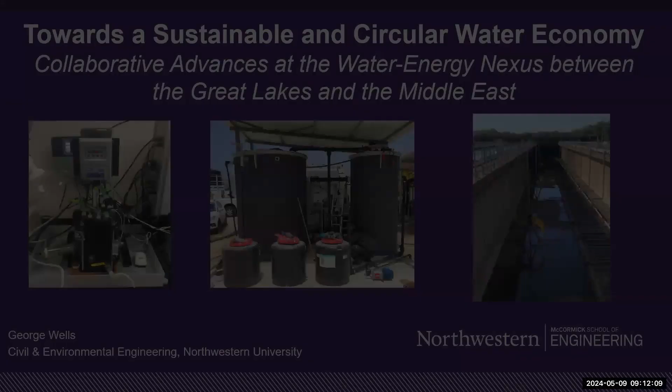Very good. Thank you, Aaron. Really a pleasure to be here, to be part of this important conversation. Really looking forward to the day.

What I want to talk to you about a little bit to sort of kick off the symposium this morning is a broad overview of some of the work we're doing at Northwestern with our collaborators, with partners, towards a sustainable and circular water economy, really trying to delve into this area of inquiry, targeting collaborative advances at the water-energy nexus for the Great Lakes and for the Middle East, Israel and the Middle East.

This is not going to be an overly technical talk. We'll delve into technical details in subsequent talks for technologies being developed through CoWERC and through Great Lakes Renew. This is going to be a bigger picture talk. I'm going to try to talk a little bit about motivations for water innovation and some of the larger scale efforts that we have at Northwestern and in the region as well.

So roadmap for today: I want to talk just a little bit about water circularity and the water-energy nexus. Then I want to talk at a high level about the role of technological solutions, in particular some of the work going on in CoWERC and in Great Lakes Renew that we're just getting off the ground — we'll hear a lot more about that throughout the day. And then I want to wrap up with a couple of minutes to make a pitch for the role of water technology collaboration in driving geopolitical cooperation. I think there's a really key role here, and I think that's one of the drivers for many of us in this area.

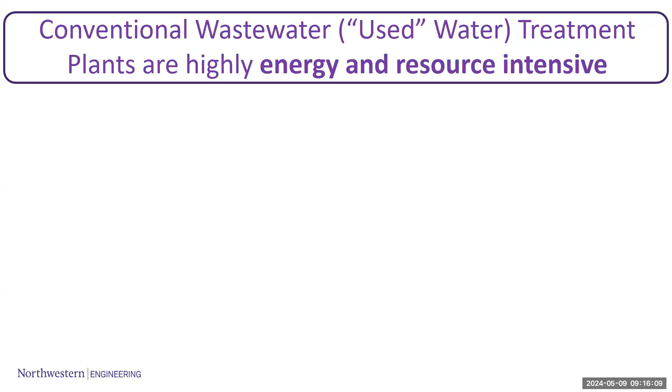Where is that energy used? Wastewater treatment in the US alone accounts for about 3% of nationwide electricity use. Most of that energy, there's actually quite a number of different sinks for energy, but a very good proportion, by far the majority, or the largest share of that energy use is used for oxygen supply to drive microbial metabolism, aerobic chemoorganoheterotrophic microbial metabolism, basically bubbling air into water. That's where the energy goes to, which is a little bit interesting.

What's paradoxical here is that when we look at the energy potential, just the chemical energy potential in wastewater, what we find is that there's a lot of potential energy there. We're expending lots of energy to remove actually energy-rich compounds from wastewater. If we widen our umbrella for what we think of as wastewater, and we include organic-rich municipal, industrial, and agricultural wastewater, the estimate in the US is that the chemical energy potential, not including thermal energy, just chemical energy potential, is about 17 gigawatts of power.

So a bit of a paradox here. We have an opportunity, I think, to flip this industry on its head, to move from an energy-intensive industry to potentially an energy-neutral or even an energy-positive, energy-producing water sector. And this really underlies what I see as a paradigm shift that is ongoing in the water sector towards resource recovery, moving from this linear processing of water.

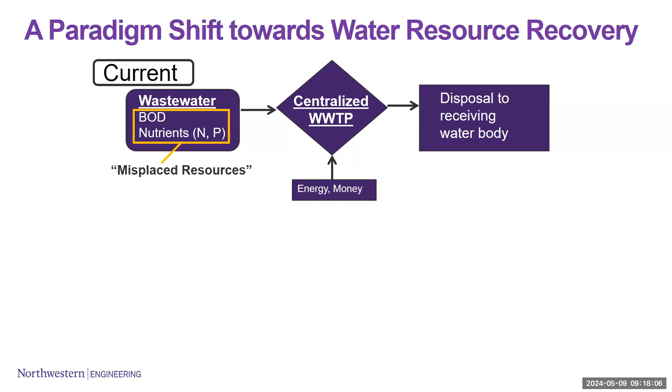The organic matter, the nutrients, the water in wastewater, these all have potential value, and it behooves us, as a community, to move towards energy-positive water resource recovery by rerouting these misplaced resources and closing the engineered water cycle, really moving towards water circularity.

So just a very high-level schematic of this vision that drives much of what we do in my group. We have used water. Again, this semantic reframing is very important in my view. It's not wastewater, it's just lightly used water with organic matter and nutrients. We send this to, I'm an environmental biotechnologist, so I like to think about biorefineries, but we can also use physical chemical processes to extract energy, nutrients, materials, platform chemicals, maybe metals and minerals as well, and of course, clean water. And where it makes sense, we reroute that clean water for reuse. This vision of water circularity and resource circularity really drives a lot of what we do in my group.

It also drives, I would say, much of the innovation, collaboration, and technology sharing that we're seeing in the water sector at this point. I'm going to mention two other drivers that I think, in my view, underline or drive a lot of this innovation at present. The second driver is a move towards decarbonized water systems, addressing the greenhouse gas footprint of our water sector.

And climate-independent water sources - this is an example of climate change mitigation and adaptation. What do I mean by climate-independent water sources? I mean moving away from a focus just on our traditional, very high-quality water sources to alternative water sources, things like seawater, wastewater, saline groundwater, and the like.

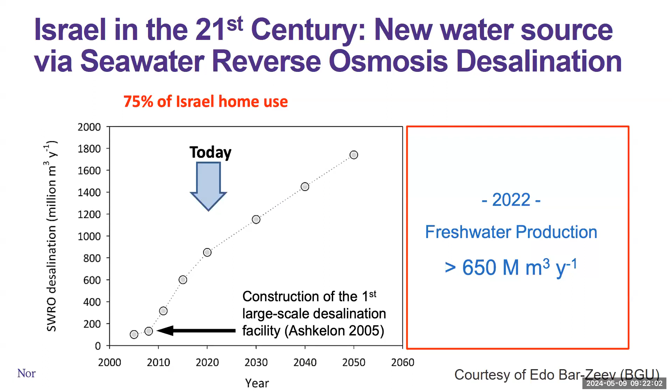In Israel, over 85%, I think it's close to 90% now of wastewater is reused, which is astonishingly high. That's the highest by far of any country in the world. I think number 2 is Spain, if I'm not mistaken, which is around 20% or so - Spain or Singapore, yep, exactly, but much, much lower percentage. So this is really quite astonishing, and again, in quite a short amount of time for the water sector.

So I want to highlight big picture collaborations now that I think are helping to drive technology advancement, technology sharing, and collaboration, transboundary collaboration.

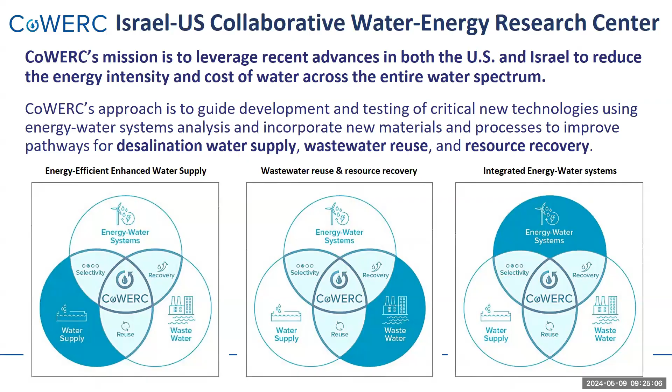We have a focus on integrated energy water systems, using systems analysis to understand environmental and techno-economic impacts of technologies. This center has been in operation for 4 years now, and has achieved some really amazing goals over that time period. I'll highlight a couple of the technologies in a minute, but I want to draw a connection here.

To the new center that Eric and Aaron mentioned, Great Lakes Renew, which is also to some extent a transboundary water innovation center. It's trans-states, but I think we're trying to develop technologies that address problems that are certainly regionally relevant, but also globally relevant.

The NSF Great Lakes Water Innovation Engine was just funded. It's led by Current, a water innovation hub here in Chicago. The mission of Current is to discover, develop, and deploy innovative technologies to decarbonize water and wastewater systems and recover valuable nutrients, critical minerals, energy, and water from wastewater—water resource recovery, moving towards this goal of water circularity.

There are very strong synergies between these two systems. The tagline, which I really like, is 'from waste to wealth and health, built in the Great Lakes, made for the world.' So we're addressing regional issues, but trying to do so in a way that contributes to solutions of water issues globally.

I'm just going to highlight a couple of technologies at a high level. I won't go into detail for the sake of time—we'll get more technical details later—but a couple of these solutions we're pursuing in CoWERC and Great Lakes Renew. The first thing we're trying to solve is the massive energy use in traditional wastewater treatment that derives from oxygen supply, about 50% of energy use comes from just supplying oxygen to microbial bioprocesses.

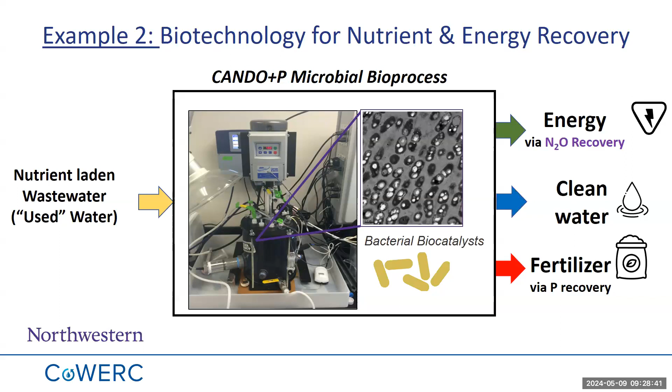The third example I'll give, just touching on a little palette of technology options—happy to answer questions and go into detail later—is a much newer project, aligned with the Great Lakes Renew efforts, where we're seeking to develop completely new ways to recover dilute nitrogen from wastewater as value-added products. We're particularly interested in an underexplored bacterial biopolymer called cyanophycin, a nitrogen-rich biopolymer that we think may have promise as a platform for nitrogen bioconcentration, partitioning, and recovery.

What have we done so far? I'm going to show you just a little bit of data here because I'm really excited about this project.

What we've recognized so far is that the metabolic pathway for cyanophycin production has been documented in a handful of model pure culture bacterial taxa studied on their own in the lab. What we don't know is its relevance in mixed culture systems and its potential as a platform for resource recovery. The first question we wanted to ask is whether microbiomes in existing biological nutrient removal systems at wastewater treatment plants already have the capacity to accumulate cyanophycin. We turned to a DNA and RNA sequencing approach to look at this.

We retrieved quite a number of what are called metagenome assembled genomes — genomes of bacterial taxa present in existing wastewater treatment plants. We asked whether we could document the presence of metabolic potential for cyanophycin in these genomes. We found that about 25% of the metagenome assembled genomes we recovered had an annotation for cyanophycin production, which is quite surprising — that's quite high. Even more surprising was documenting this metabolic potential in a couple of the functional groups very important to driving overall performance in enhanced biological phosphorus removal and biological nitrogen removal systems, for example so-called polyphosphate accumulating organisms.

We also looked at some gene expression data, metatranscriptomic data from a lab-scale enrichment reactor in our lab, for this key functional group, polyphosphate accumulating organisms. We showed that these cyanophycin pathway genes are not only present but expressed at a very high level. To me, this is quite promising. I want to emphasize this is very low on the technology readiness level scale — early stage research — but we think it's promising because it shows that metabolic capacity for cyanophycin accumulation may be surprisingly widespread, even in existing biological nutrient removal processes. Because of that, we may be able to use existing infrastructure as a platform for nitrogen bioconcentration, partitioning, and recovery. Hopefully more to come on this line of research in the years ahead.

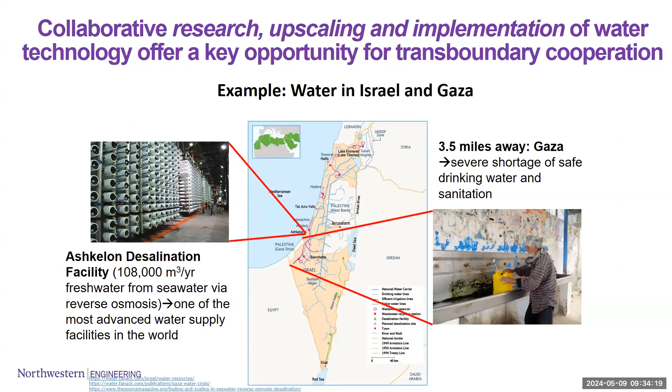About 3.5 miles south of Ashkelon is the border with Gaza. The length scales are amazing in Israel — just very, very close, 3.5 miles south, less than we traveled from Evanston to come downtown today. So very short length scales. And of course, Gaza has experienced severe water challenges for years, on both the drinking water side and the sanitation side. It's estimated that less than 4% of domestic water supply in Gaza is fit for human consumption based on WHO guidelines. What I find really interesting is that's just for drinking water — there's also relatively poor sanitation, with lots of untreated wastewater released from Gaza as well. Water, of course, does not recognize political boundaries.

So the water from Gaza, particularly from northern Gaza, Gaza City, untreated wastewater, goes into the Mediterranean Sea, which of course is the source of drinking water for the Ashkelon desalination facility. And there have been instances where, because of prevailing currents et cetera, that untreated wastewater release has impacted operation negatively at the Ashkelon desalination facility.

So as an engineer, a water quality engineer, I want to point this out. I'm looking at this from a glass half full standpoint. I think this is a clear opportunity for hopefully future water technology sharing, collaboration, and solutions for water crises, hopefully to promote geopolitical cooperation as well. So I'll put that out there for discussion.

I think many of us got into this field because we're interested in solving transboundary water problems. I think this is one area that we can maybe contribute.

So with that, a couple of takeaway points to wrap up. I think I am a little bit over time already here. Hopefully I've convinced you that innovations in water technology are accelerating the transition to a circular and sustainable water economy in the Great Lakes region, the Middle East, and beyond. We touched on energy, nutrient, and water recovery and reuse, decarbonized water systems, and then non-traditional water sources like seawater and wastewater. And finally, I wanted to make the point that I think at least research and innovation in water technologies offers a key opportunity for transboundary water collaboration.

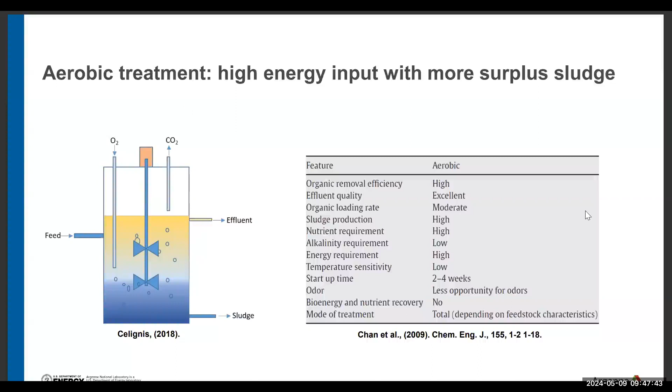So when we look at resource recovery in terms of energy or nutrients, unfortunately aerobic treatment is not friendly for us. When we look at anaerobic digestion treatment, it requires less energy input with potential of recovering carbon in the form of bioenergy, as well as recovering nutrients. When we look at effluent quality, it is not as great as the treated water from aerobic treatment.

The good news is that with this treatment, we can produce less sludge, which helps reduce the cost of sludge treatment. On the other hand, startup time is really higher than aerobic treatment processes, ranging between 2 to 4 months.

We also need to consider the other issues with anaerobic treatment processes. When we look at the anaerobic digestion of organic complex matter, it usually happens within 4 steps.

The hydrolysis step is needed for soluble organics production from highly complex organic matter. Then it is followed by acidogenesis, which results in volatile fatty acids ranging between carbon 1 to carbon 4 carboxylic acids. Then the acetogenesis step takes place with the aim to produce acetic acid. Then methanogenesis, where methane and CO2 are produced.

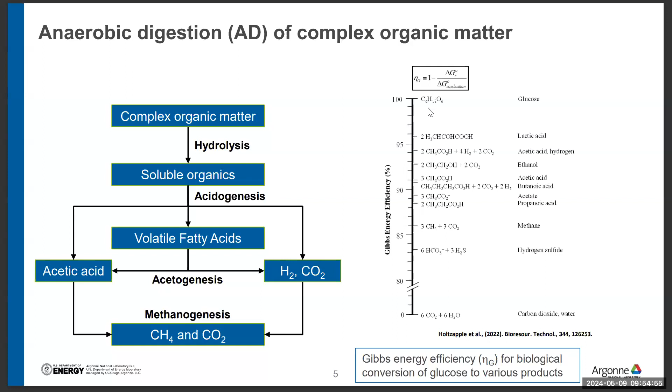As an engineer, we also need to look for the energy efficiency of these conversions. For example, to produce organic acids from glucose, the Gibbs free energy efficiency is around 96%. If we produce methane, it's around 86%. So actually we are losing efficiency if we go from organic material to methane production.

When we are dealing with high-strength wastewater, it is highly digestible. Since it's highly digestible, it results in acid accumulation within the regular conventional anaerobic digester environment, which causes process stability issues, low digestion rates, and requires additional effluent treatment.

So we wanted to use these imperfect conditions as a new paradigm to actually produce carboxylic acids at higher concentrations, to produce them as platform chemicals. They can be used as is, or used in the formulation of bioproducts as well as biofuels. So I would like to share with you our recently published paper, where we are using synergy between anaerobic microorganisms.

If we arrest the methanogenesis, we can produce carboxylate salts. And after separation and purification of these carboxylate salts, it is possible to produce ketones, ethers, aromatics, and paraffins from carboxylic acids as well.

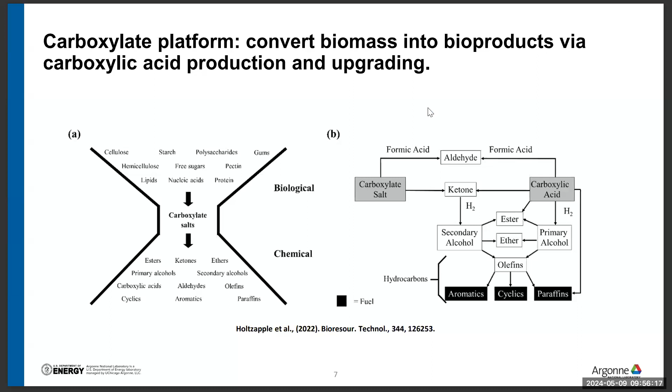This is a DOE-funded project. As we all know, the U.S. government 2 years ago put out a Sustainable Aviation Fuel Grand Challenge to meet 35 billion gallons of sustainable aviation fuel per year, to meet 100% of aviation fuel demand and fully decarbonize the aviation sector by 2050.

Since Argonne is owned by the Department of Energy and operated by the University of Chicago, all our research activities align with the Department of Energy's mission. So in order to produce sustainable aviation fuel, we really need a low carbon intensity feedstock, as well as a low cost feedstock to reduce the cost of the fuel. High strength wastewater treatment provides a great opportunity in that case.

Our aim was to enhance volatile fatty acid production via new innovative processes, and also explore the downstream acidification and purification via systematic process evaluation. Because when we look at sustainable aviation fuel, ketonization, aldol condensation, and hydrodeoxygenation steps are very well known by the chemical industry. But what is not known is how we can produce organic acids efficiently, cost effectively, and sustainably. That was our objective.

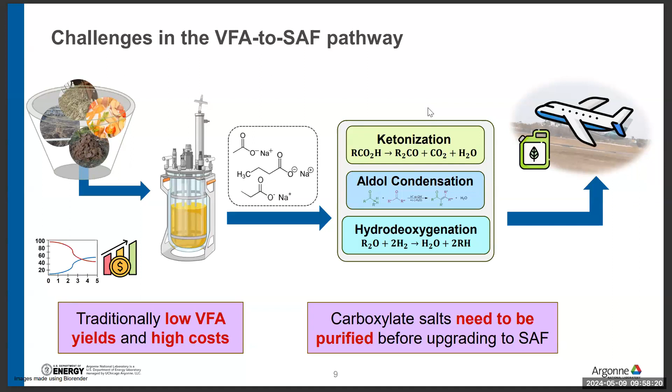So we first started with tailoring the microbial consortia. For that, we used marine microbes. We collected saline beach sediments. We used microbes coming from yogurt, kefir, or cheese samples, as well as pure acid producer strains. We exposed them to acid shock as well as heat treatment.

We then aimed to generate a new microbial consortia that are highly resilient and robust, that can provide us high salt tolerance as well as high volatile fatty acid titer, yield, and productivity. So we have been developing a new paradigm for resource recovery instead of thinking about water treatment.

So we have to develop a new process with high treatment efficiency, which is going to help us valorize these low-value organic waste streams to produce high-value products with low carbon footprint. Most importantly, it's going to give us the most resource recovery as well as nutrient recovery from high-strength wastewater.

So we started our experiments at a small scale, a 0.5 liter anaerobic digester, and we looked for what would be the best operating envelope for these new operations. We tested temperature, feedstock composition, their concentration, as well as pH, and the microbial consortia.

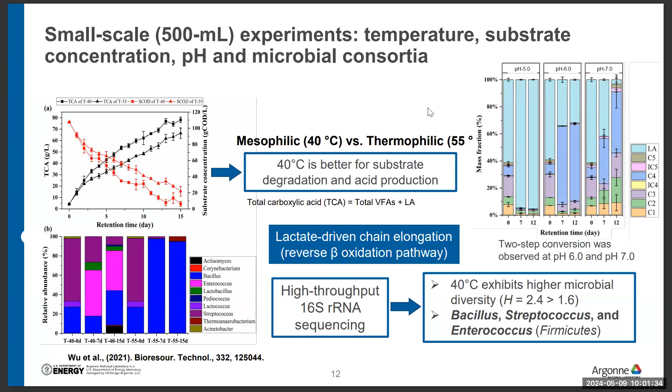We also conducted metagenomic analysis. This is very important because we need to know the key players in this highly mixed and diverse consortia. We found that Bacillus, Streptococcus, and Enterococcus family microbes are the key players when it comes to converting high-strength wastewater into high-value products.

We tried to understand the link between wastewater characteristics and operation time, and how to optimize them so we could scale up the process to the next step, which is 14-liter digesters. As I mentioned before, we also learned how to direct the digester operations through biorefinery operations.

If I set up the pH at 5, my targeted product will be lactic acid. But if I want to produce butyric acid or lactic acid, I have to play with the pH as well as the residence time. So those small scale experiments provided guidance for us to conduct the next step of 14-liter digester operations.

We looked at many different parameters that are important for the next scale-up experiments: organic loading rates, retention time, feedstock composition, and what the feed and harvest frequency should be.

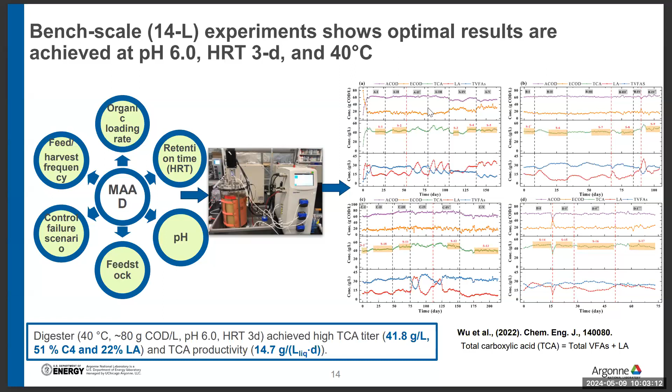Based upon those things, we were able to understand our system response and performance in terms of acid titer. We were able to produce around 42 grams of acid, with 51% being butyric acid and 22% lactic acid. Its productivity was around 15 grams per liter per day.

In this slide, I'm trying to compare whether there's any decrease when I scale up the process from 14 liters to the 100-gallon digester operations. At the 30,000 foot level, there isn't much difference in total carboxylic acid concentration. But when I look at the total volatile fatty acid concentration, I see a big decrease, about 30%. This tells me I need to increase the hydraulic retention time further, to allow the slow-growing butyric acid producers time to establish their microbial consortia within the digester system.

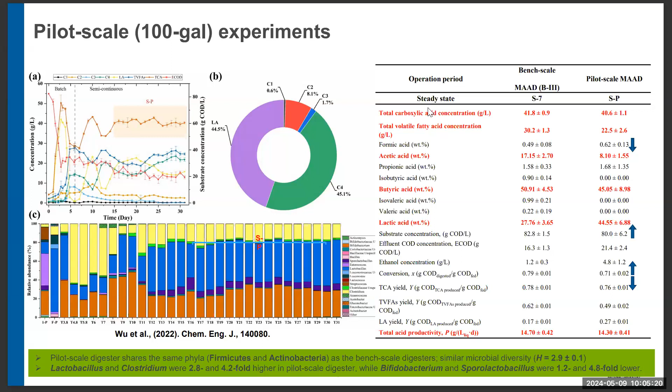Based upon those results, we saw that we really needed to increase the hydraulic retention time. That's why we also tried submerged membrane reactor operations, aiming to enhance volatile fatty acid production. When we did that, total volatile fatty acid concentration increased from 22 grams per liter to 30 grams per liter, and 98% of the acid profile consisted of volatile fatty acids. This was a great achievement when we switched the reactor configuration from a regular anaerobic digester to submerged membrane reactors, and the substrate conversion was around 72%, which is good.

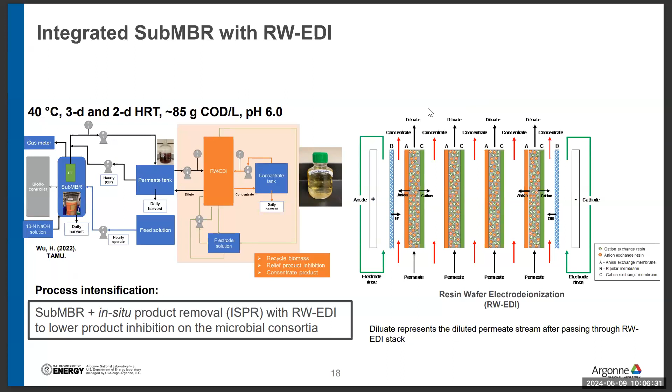When we look at the process economics, we saw that product toxicity is also an issue. So to reduce the product toxicity, we developed an in situ production as well as separation process using Argonne's electrodeionization patented technology. When we use electrodeionization technology along with the digester, we saw we were getting better total carboxylic acid production. It was before around 30 grams. By using this in situ production and separation integration, we were able to increase the acid titer to 115 grams per liter, which is great.

Test results show that when we integrate the separation and purification into the digester operations, we increase acid productivity by 36%. We also saw that substrate conversion increased from 72% to 78%, about a 1.1 fold increase.

In summary, it was a great learning experience for us, showing that we need to look for different anaerobic digester configurations to increase acid productivity as well as titer.

When it comes to process evaluation, we need to model the anaerobic digester operations, and this modeling also helps us design and model individual unit operations based on experimental data. By using Aspen Plus and SuperPro, we can determine the size as well as the cost of equipment, allowing us to conduct techno-economic assessment analysis, and calculate the minimum fuel selling price of sustainable aviation fuel if we use high-strength wastewater.

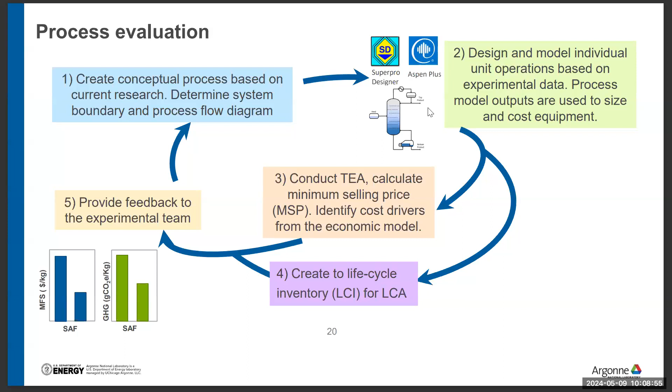The outcomes of the techno-economic analysis were fed into Argonne's GREET model to conduct life cycle analysis of these new processes. The integration of this data analysis and modeling is crucial for the experimental team because it allows us to determine the pinch points to reduce cost as well as reduce greenhouse gas emissions from this new bioprocess.

When conducting any techno-economic and life cycle analysis, we need to determine the system boundary of the wastewater. Since this is a new wastewater treatment paradigm, we have to include all required process operations, and then develop scenarios. We developed three scenarios.

Separation and purification is important because it can take up to 70% of the total acid production cost. So we focus on cation exchange resin for volatile fatty acid acidification, as well as anion exchange resins, and also recycling of sodium hydroxide, which is one of the important GHG pinch points for us to reduce GHG emissions from digester operations. We really need to reduce the sodium hydroxide.

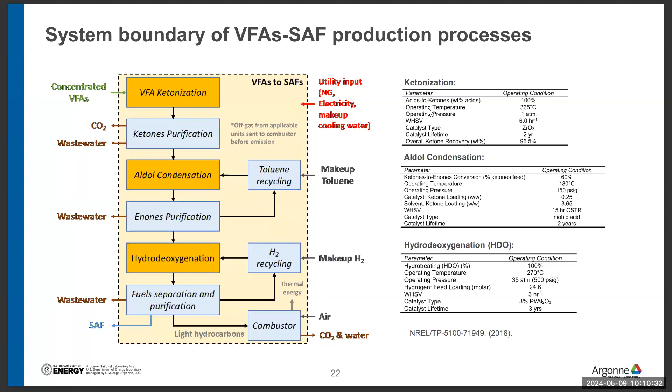We also looked at what the application would be if we produce volatile fatty acid, when it comes to sustainable aviation fuel production. So we determined the required processes such as ketonization, aldol condensation, enones purification, and hydrodeoxygenation, and what unit operations, unit processes, and operating conditions were required. We determined these either from published literature or using American Petroleum Institute guidelines for the operation of those processes.

We conducted techno-economic analysis for producing volatile fatty acid from wastewater, and using this volatile fatty acid to produce sustainable aviation fuel. We conducted these analyses for different wastewater generation rates, starting from 100 metric tons per day up to 1100 metric tons per day. We aimed to simulate small cheese and beer production, brewery operations in the US, as well as the highest operations in the US. Our techno-economic analysis results show that we will be able to produce volatile fatty acids with a price tag comparable to the current price of volatile fatty acid produced from fossil-based feedstock.

When we use the sodium hydroxide stream and recycle it back into the system, we saw a 36.4% decrease in the price of volatile fatty acid production.

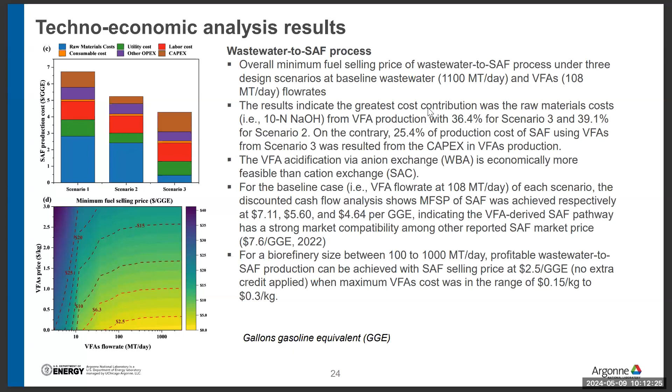We also calculated the minimum selling price of sustainable aviation fuel. Currently, it was determined to be around $7.6 per gallon gasoline equivalent. With our three different scenarios, we actually exceeded those expectations, and our third scenario gave us a fuel price of $4.64.

When conducting any techno-economic analysis, we also have to conduct sensitivity analysis, considering all the cost drivers that are part of the cost calculations. So we looked at how changes in total capital cost, electricity price, or water treatment would impact the total price of the volatile fatty acid.

Or when it comes to the sustainable aviation fuel, for example, we look for the toluene price, which is mostly used for production of sustainable aviation fuel. So based upon those sensitivity analyses, we will be able to determine the impact of each parameter on the total selling price of the volatile fatty acid as well as sustainable aviation fuel.

And the outcomes of this techno-economic analysis were used to conduct the life cycle analysis. I'm sharing with you the life cycle analysis results.

Currently, fossil fuel jet has 85 grams CO2 per megajoule for sustainable aviation fuel. So with this new approach, we will be able to produce, especially with scenario 3, three times less than the current fossil jet greenhouse gas emissions. So this is really great news for us.

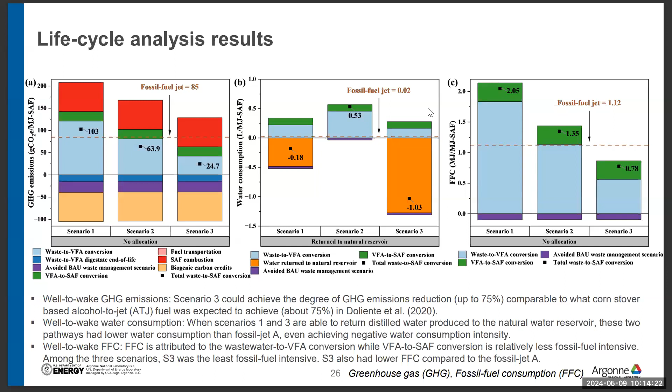So in summary, I would like to share with you that we developed and scaled up a novel process from 0.5 liter to 375 liter within 3 years to valorize the high-strength wastewater through the carboxylate platform. And we developed a robust and resilient microbial consortia, which is very important for any bio-based process operations. We also experimentally determined the links between wastewater characteristics, microbial community structure, as well as digester operations.

Experimental results show that this new anaerobic digestion technology has the potential for large-scale application, especially transforming low or negative value high-strength wastewater into high-value products. And currently, we are scaling up that technology from TRL level 5 to further.

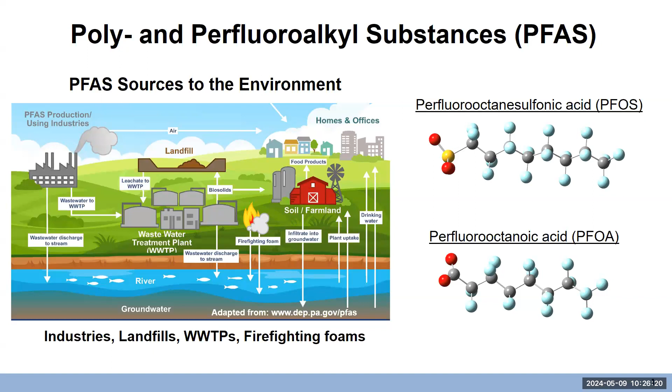So a little timeline here. PFAS was invented accidentally in the 30s, 1938. It was actually looking at refrigerants, and they had a polymerization reaction inside of a pressurized vessel and discovered Teflon. And that's where the story begins. They were first used in the Manhattan Project, so here in Chicago, for the nuclear bomb, and then over the decades were incorporated into more products.

Around the 2000s, where analytical chemistry became much more sensitive, these compounds were detected worldwide. And then within the last few years, really, there's been a lot of activity to actually regulate it.

So I'll go through the timelines quickly here. In 2021, the House passed the PFAS Action Act, tasking the EPA to start to regulate PFAS. From there, they went through a process of developing health regulatory limits, and ultimately, just last month, they have federally enforceable standards for many of these compounds.

So PFOA, which is a common one, 4 nanograms per liter. PFOS, 4 nanograms per liter. PFNA, 10 nanograms. PFHex-S and GenX, both 10 nanograms per liter.

So to put this concentration in context, if you had a small grain of salt, that would be about 1 milligram. We're talking about orders of magnitude smaller than that. So the amount that is in a liter of water, you can basically not even measure or see. So it presents a very big challenge to the remediation of these chemicals from water.

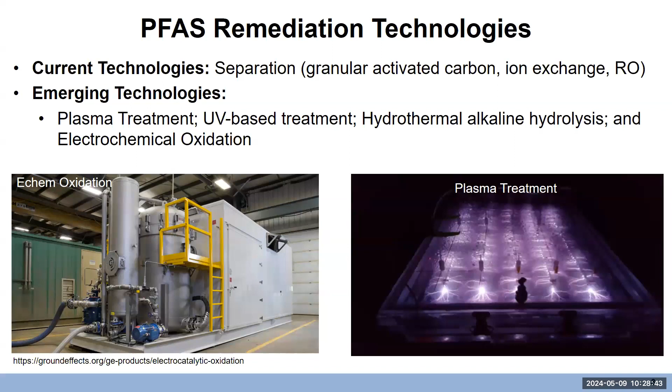So a little background on how these chemicals can be destroyed by electrochemical oxidation. We think of this as having two different oxidation mechanisms. In general with electrochemical oxidation, there's indirect oxidation, where water can react on an anode surface to produce very reactive hydroxyl radicals that then react with other compounds. Hydroxyl radicals are not reactive with PFAS, so a lot of these advanced oxidation processes used in water treatment do not remove these chemicals.

The other mechanism for oxidation at an electrode surface is direct oxidation, and this mechanism can actually lead to destruction of PFAS. The compound can approach the surface, transfer an electron into the anode, producing a radical species, and then a combination of hydroxyl radicals as well as direct oxidation reactions can ultimately lead to mineralization of these compounds. So if we have PFOS, we can end up with sulfate, fluoride, and CO2, which are harmless end products.

There is a lot of concern with what happens once we remove some of these parent compounds, because traditionally they form shorter chain compounds that are still toxic. So eventually, to alleviate concerns about toxicity of products, we really need to go to mineralization, which is difficult and requires lots of energy.

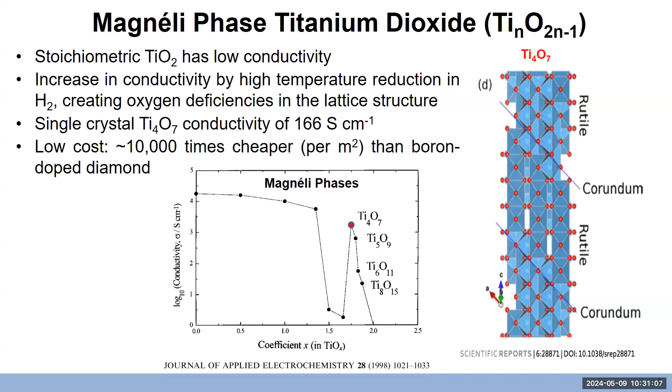We have a graph here showing that if we get to the phase of Ti4O7, which is TiO 1.75, that has the maximum conductivity. We've also had other studies show that it produces the highest yield of hydroxyl radicals, which is good in general for electrochemical water treatment. Also, if we compare it to the state-of-the-art oxidation electrodes, boron-doped diamond, it's about 10,000 times cheaper on a surface area basis, so it's considerably cheaper than state-of-the-art electrodes.

One advance we've made, which is a very simple concept but very effective, is the redesign of the electrode structure. Typically, electrochemical reactors operate with two flat plate electrodes where we flow water in between them. What happens in this scenario is you get a very large diffusive boundary layer.

The contaminants have to diffuse maybe 100 microns to get to the surface. So even if you try to increase the surface area by putting features of roughness on the electrode, those are usually very small compared to this length scale. So they get averaged out in this diffusive field, and they don't really take part in the reaction.

What we've done is made porous electrodes, where we can flow the water through the pores. Nominally, they have about a 1 micron pore radius, and that shrinks down this length scale for diffusion. We have 100 microns versus a pore radius of 1 micron or less. So in that scenario, we can put features of roughness on the same order of magnitude as the diffusive length scale, and they can take part in the reaction.

So we can get high removals with just a single pass of flowing it once through these porous electrodes, because of the very high surface area and the fast mass transfer. So we have a technology that we're calling reactive electrochemical membranes.

We have a patent on this, and this shows some of these tubular membranes. We start with TiO2, we reduce it to Ti4O7, and conductivity increases by several orders of magnitude. You can think of this - if we operate it like a typical membrane, it has the features of separation, but also has the features of being a reactive surface.

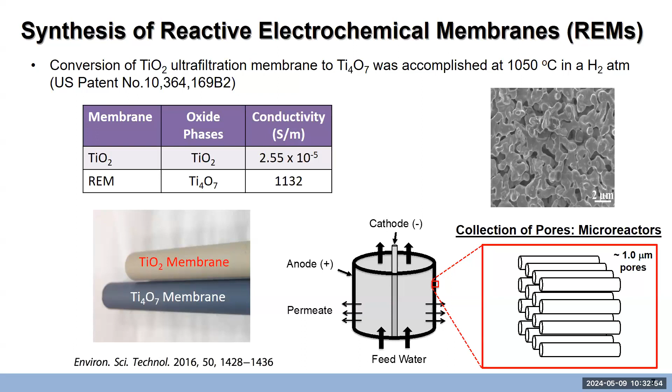So we can think of this high surface area as a collection of microreactors, where all the internal surface area in these pores can take part in the reaction.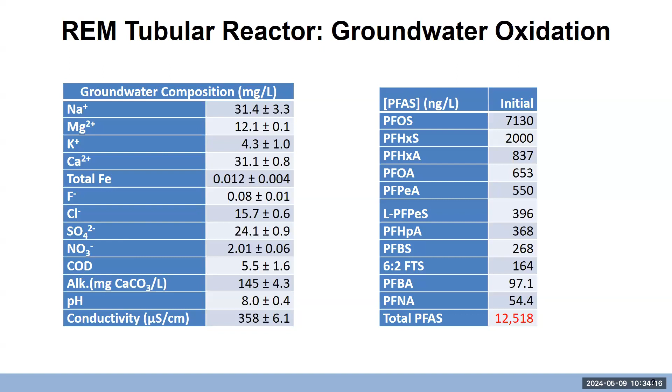We have good removal of PFOS and PFOA, which are now the Superfund chemicals. Then some of these shorter chain compounds, like penta - 5 carbons - and buto - 4 carbons - we actually see accumulate.

If you're into the details of these oxidation mechanisms, that might seem a little strange, because usually if you take a parent compound like PFOA or PFOS, it degrades to form carboxylates. So the fact that we have these sulfonate compounds accumulating is likely related to some of these precursors we have in solution - these are different structures that I showed earlier.

What we think is going on here is we're cleaving this sulfur-nitrogen bond in these cases, which is actually producing some of these shorter chain compounds. So this is our initial result with groundwater.

What we've determined is that although the electrode material we're using can degrade these compounds, it's doing it too slowly. So we need to speed up this reaction, and where we go from there is to put a catalyst on the surface of our electrode. We're using a bismuth oxide, tin oxide catalyst, which I'll abbreviate as BTO.

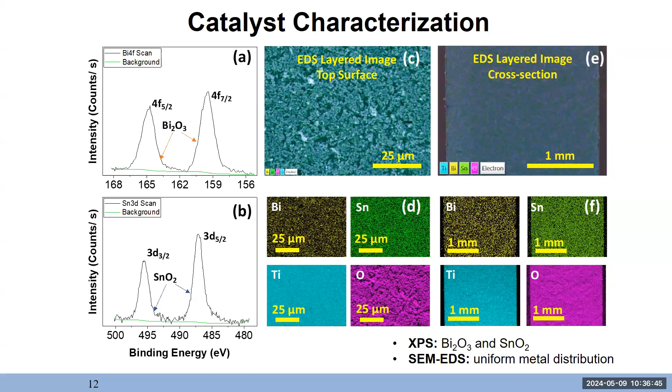When we started work here, we used a slightly different reactor. We're looking at just these pellets in order to save on the mass of chemicals used. And here, instead of doing 100% recycle, we're looking at a single pass, meaning how much removal can we get with just passing through the electrode once—because ultimately that's what we're going to want to do in practice.

So our first results, we're just looking at PFOA oxidation. This is a surrogate just to see if this technology is effective. I'll go over the experimental conditions here. We have a high concentration of PFOA, much higher than what we saw in the groundwater. The reason for this is most technology treatment trains think that destroying the chemicals directly in the groundwater is not energy efficient, so first you want to concentrate them by some means.

That could be by a membrane, or by a sorbent, and then take that concentrated solution and do some kind of destructive method. That's going to be the most energy efficient and most affordable approach. So we start with a high concentration, we use an inert electrolyte, and our residence time is 13 seconds. Everything I'm showing here is just 13 seconds of reaction time—how much removal do we get?

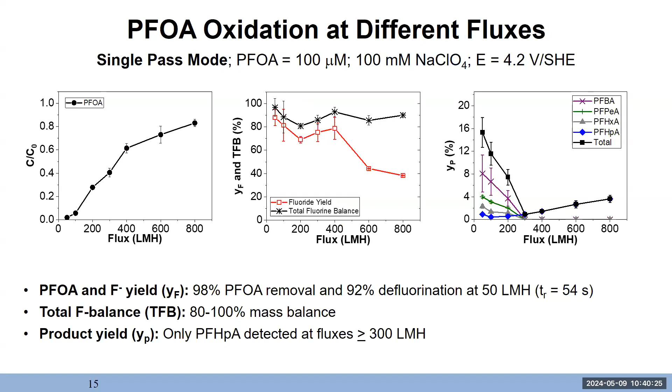Okay, if we look at the effect of carbon chain length, that's important, because what we saw in this prior slide is that we're starting to form successively shorter carbon chains. So we have to look at the reactivity of PFOA, but when the chain shortens, how does that reactivity change? This is all done at a very short residence time.

So in the future, if these shorter chains become regulated, they are going to ultimately dictate what kind of system we have to employ for treatment here.

So if you're thinking about the mechanism for this, traditionally what was talked about was—if you love chemistry, this is great. If not, look at your phone.

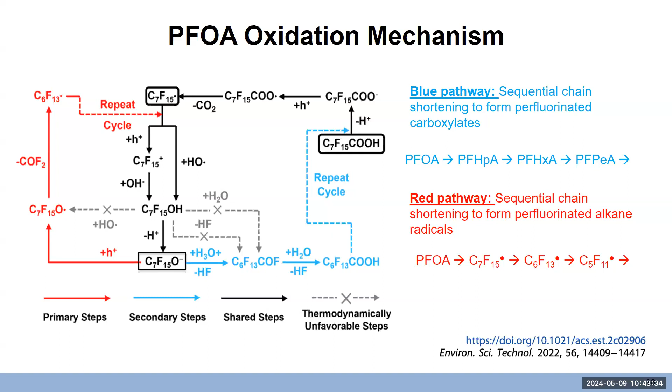This is an alternative pathway that does not have chain shortening. It goes through this alcohol intermediate and basically just forms a radical that likely adsorbs to the surface of the electrode and then further reacts. So there seems to be a small amount, about 10% of the yield, going in this direction, producing these shorter chain compounds. Roughly 90% is going through this other pathway, which is good in our case because it's forming these radicals, adsorbed to the electrode, further reacting, and allows us to achieve close to complete mineralization.

Okay, so I think I am done. Just to summarize, what we saw in our initial experiments that I shared was that in the groundwater, we were able to do about 85% removal of these compounds in this full recycle mode, but we did notice that these kinetics are not sufficient for what we would like.

So we are exploring this tin bismuth oxide catalyst. I didn't show the controls, but we were getting about 10 times faster kinetics than just using this substrate by itself. And what I just talked about at the end is that this product yield, as well as our reaction kinetic studies, indicate that the traditional mechanism is not what's happening for electrochemical oxidation.

As we move forward with this work, we're really focused on catalyst stability and treating these concentrated streams. The problem we have is that the carbon-fluorine bond is so strong, and you saw the very high potentials I have to get to remove these compounds, that you can imagine everything else is also destroyed. So we've had to move to expensive current collectors and really focus on our ability to immobilize this catalyst under these very, very high anodic conditions. So that's work that's in progress.

Can you hear me, right? Okay, so I'm going to be talking to you a little bit about reuse in Israel, what we've been doing so far and what we're planning for the future. A little bit about Mekorot, which is Israel's national water company.

We handle thousands of installations of various types. We are the largest supplier of water in the country, both potable and other types of water. And one of the main reasons why I'm here is because we also deal with wastewater purification, treatment, and reuse.

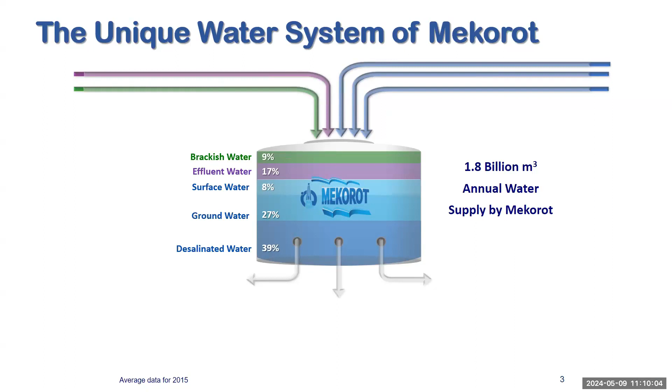Mekorot supplies many different types of water. We have a very interesting, complex, and to some extent unique system. We supply desalinated water, groundwater, surface water, effluent, and also brackish groundwater, which we desalinate and currently use for agriculture, but in the future might use for potable uses. Those waters are supplied for industrial, domestic, and agricultural uses, which is what we're going to focus on.

Israel has a very complicated environment, and that's why water reuse has been practiced for so many years. We started reuse in the 80s, so it's been north of 40 years that we've been doing that quite extensively. The main driver was sheer necessity, the lack of water, and a huge discrepancy between where water falls and where water is needed, between where water falls and where agriculture is practiced.

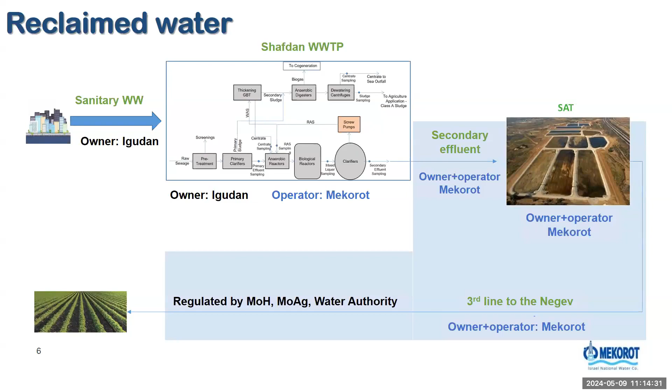This is the SAT process, the soil aquifer treatment. Basically, we take secondary effluent from the Shafdan and infiltrate it in dedicated infiltration basins in the sandstone aquifer along the coast of Israel. It's a very loose sandstone aquifer, and the topsoil is just loose sand, so it provides a really good natural filtration mechanism that also hosts a lot of bacteria that can break apart some of the organic matter that comes in with the effluent. We infiltrate the water through the soil, it goes to the aquifer, and then it's produced in recovery wells. Once it's produced, we call it reclaimed water.

It's actually so unique that it's not even officially defined in our regulations. It's just that's the water quality that's been produced for that water source for the past 40 years or so. And for that reason, our regulations allow it to be used without restrictions for irrigation, even for leafy greens.

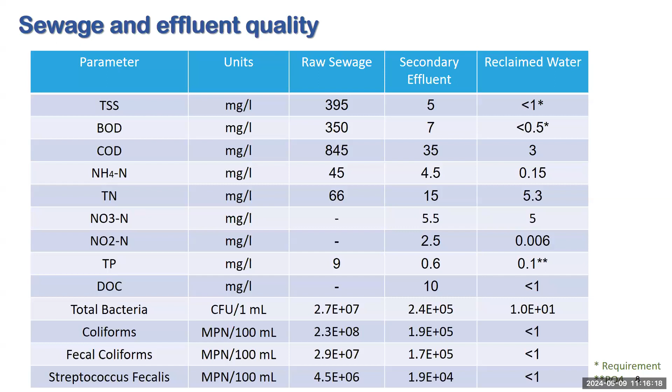The challenge becomes that the Shafdan is located in the suburbs, just outside Tel Aviv, a little south, but it's all along the coastal Mediterranean. And we have a huge challenge with housing in Israel. Everybody wants to live in the center, and lands are very limited. Some of those infiltration basins are located right where people would really love to live.

It's practically impossible to create new infiltration basins, and the existing ones are at capacity. Of course, population keeps growing in the center. So we need more and more solutions to be able to produce more of this type of water, to produce more agriculture, and to treat the growing amount of effluent that's being produced at the Shafdan. We cannot, as I mentioned, create new infiltration basins.

So it's been clear for almost two decades now that we have to come up with an alternative solution that can produce the same quality of water, but in an engineered technique, an engineered way, not a natural-based solution.

And the biggest challenge, the first challenge we had to overcome, was what water quality we would need to meet, because the reclaimed water quality is not defined by regulations. The plan is to convey whatever water comes out of this engineered solution at the same pipeline with the reclaimed water from the soil aquifer treatment.

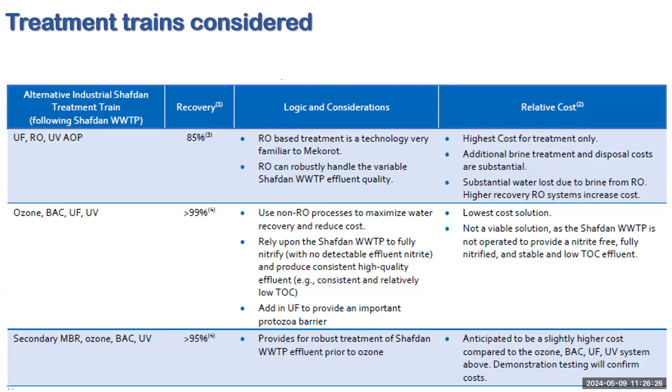We also considered starting with ozonation, BAC filtration, and then going to a filtration step. But this was not possible either, because we needed some sort of pre-treatment before ozonation to make the ozonation effective and it was also too costly. So this is the treatment train we ended up selecting, which was in the last row there: low-loaded MBR, ozonation, BAC filtration, and then UV disinfection.

The goal of the system overall, and also of its different components, is to both improve the quality of the water, get rid of trace organics, and mainly to disinfect and remove pathogens.

The reason we're starting with low-loaded MBR, which is not very common - we're actually, I think, the second ones to consider this - has 2 reasons. First of all, it has to do with the regulatory requirements for ozonation, and we had to reduce turbidity quite significantly so that ozonation is effective, fulfilling its role in both trace organics removal and disinfection.

The other reason is that the Shafdan currently is not fully nitrified. So it produces not only nitrate, but also nitrite and ammonia. And nitrite is a huge ozone guzzler, and ammonia is a precursor for byproducts. So we had to make sure that before we enter ozonation, we get rid of as much of the nitrite and ammonia as we can, basically reach full nitrification. That's pretty much why we had to start with an MBR and not with a UF.

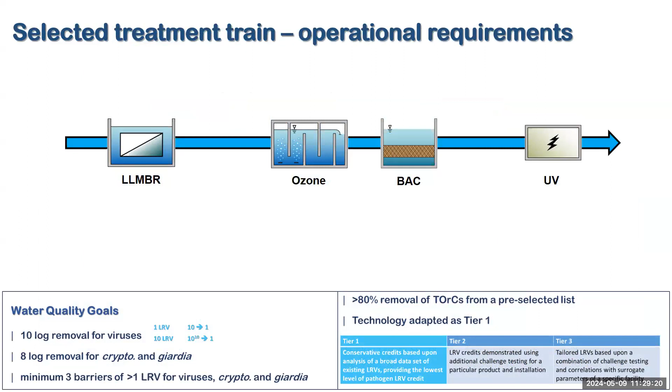So you can see below the water quality goals we had to meet, based on what the Ministry of Health required, and I want to show you in a little more detail. Also you can see the roles of each process, and the pre-requirements we had to meet on the transition between processes and the operation of the processes.

For instance, before entering ozonation, the water entering from the MBR had to be fully nitrified, which we defined as nitrite and ammonia below 1 ppm. We also had to reach a turbidity below 0.15 NTU, which is close to being an imaginary number. It's so low that, to the best of my knowledge, there's only one turbidity meter that can reliably measure that low a concentration. And the 0.15 comes from an Australian regulation.

The California regulation calls for 0.2. I cannot describe the amount of discussions we've had with our Ministry of Health trying to convince them to go up from 0.15 to 0.2, which sounds like a huge waste of time, almost insignificant. What's the importance of 0.15 versus 0.2? But when you're talking about these low concentrations, and the need to meet them 90 or 95 percent of the time, it can actually make a difference. Also, measuring wise, it's a lot easier to measure 0.2 than 0.15, in spite of the small difference.

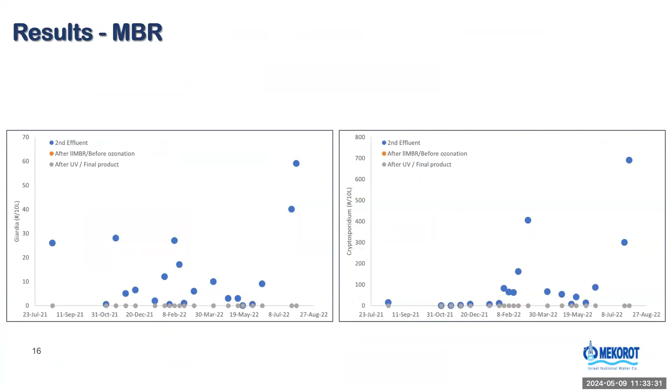Okay, so I have a bunch of slides showing the results from running this system for about two years. Basically, we managed to tick all the check marks. We showed that the MBR removes pathogens the way it's supposed to, it meets its turbidity goals, it meets its nitrification goals, and ozonation removes trace organics like expected.

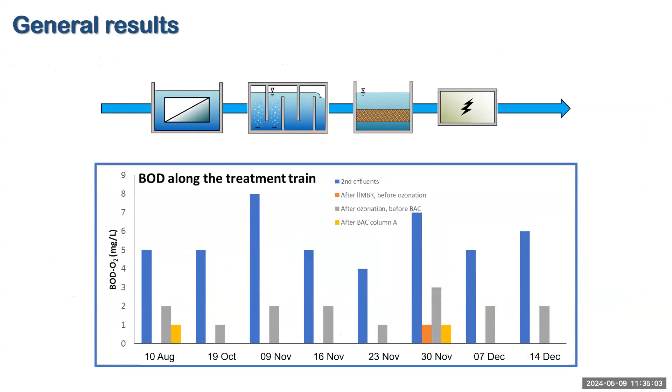And just generally speaking, we see the BOD doing what we expect it to do. There's biological oxygen demand coming into the system. It goes to zero after the MBR, goes up again after ozonation, and then it goes down again after the BAC filtration.

So we managed to tick all the marks and get the authorization from the Ministry of Health to pursue a full-scale facility, which is what we're currently doing.

It's turning out to be a lot more complicated than we had expected. So what we're going to have in the future is the Shafdan wastewater treatment facility, which will still produce secondary effluent, going both to the SAT and to the engineered solution. The engineered solution is supposed to prevent us from discharging any excess effluent to the environment.

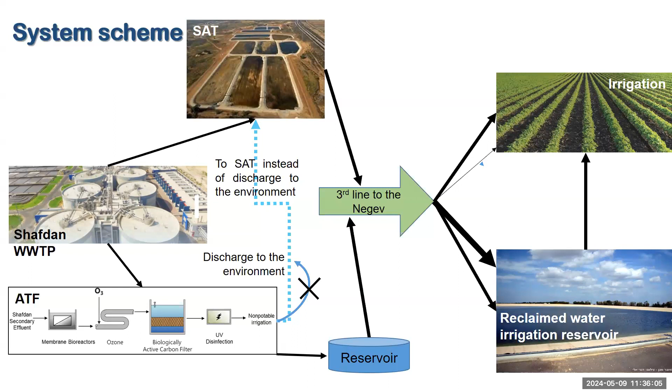But also, in cases we do need to release to the environment, the engineered solution might need to send water that's not good enough into the line that goes to ag users. We might need to return it to the soil aquifer treatment. And then it all joins together in a line that goes to the south, used both for reservoirs and for irrigation. That's what we've been designing these days.

I'd love to answer some questions if I have the time. Also, just to say that we are heavily invested in R&D activity in this field, but also in many others, and we're always looking for new collaborators.

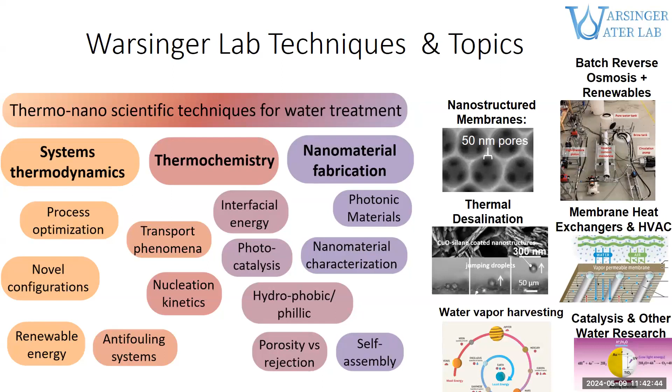So forever chemicals - these are per and polyfluoroalkyl substances. We did some of this intro before, but I wanted to reiterate some of these sources: a lot of food products, non-stick on your pizza boxes, fracking and oil and mining extraction using lots of these chemicals and putting it into the groundwater, a lot of furniture and floor polishes that are now being made illegal in some places, more in Europe than the US.

A lot of industry sources, including airplanes, and anything that's stain resistant, even your rain jackets that are water wicking, are likely using PFAS. The advantage of why this bond is so good and bad is this CF bond is really, really stable. Fluorine is the most electronegative element, which means it can give compounds really low surface energy and can be thus very hydrophobic and thus repels lots of stuff. But then the bond is really, really stable - our bodies cannot break those down.

So there are a lot of costs to PFAS. We have issues dealing with them in water filtration, impacts in agriculture. A major source of this is actually firefighting chemicals. One reason you'll see all these funding opportunities coming out from the Army is they would use foams that are PFAS based - basically spraying PFAS foams across an entire hangar. There are stories of 6 foot deep foam, and then you just wash it out into local waterways.

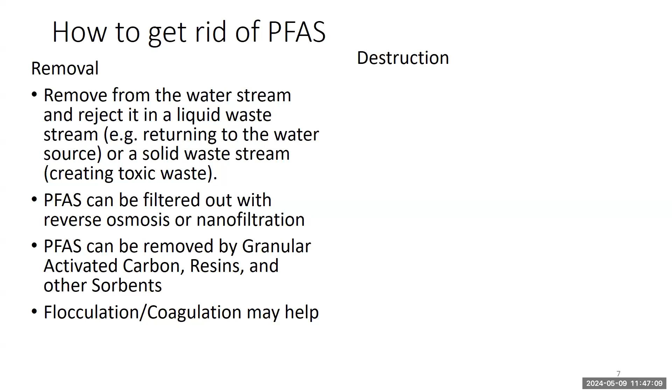So we would really like to destroy these compounds. Now, those separation processes may be able to absorb it, and in those sorbents, we'll have this toxic thing to dispose of. But that's our best case - more nasty toxic landfills. So we want to break these things down, also converting to sulfates, fluorine ions, oxygen, and CO2. We're using redox reactions, but it's very challenging.

I mentioned this already - the hydroxyl radical, which is the ubiquitous method to destroy stuff in water treatment plants and advanced oxidation processes, actually cannot break this carbon-fluorine bond. So we need alternate techniques. The energy numbers are very, very high.

Just for some context, in desalination, where I really do most of my research, about a third of the lifetime costs are energy. And the available electrochemical processes today use more than an order of magnitude more energy than desalination does. So the cost of water is substantially more than conventional sources if we have to treat it.

So we have the sorbent processes, and we have kind of different ends of these molecules - a hydrophobic piece and often a charged piece. Some approaches to remove these compounds: granular activated carbon can absorb the tail, and then selective resins might try to absorb and attach to some of these other functional groups.

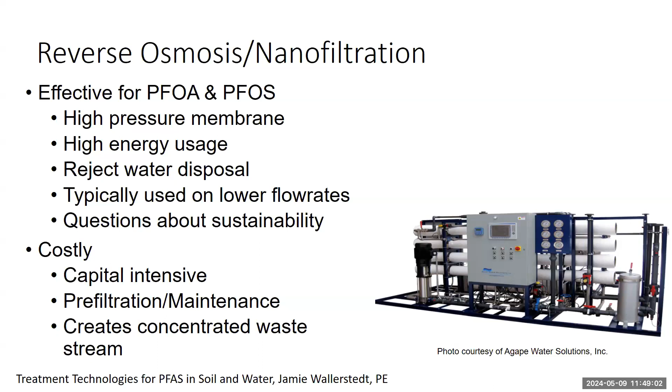For filtration effects, these are largely size-based, and we'll basically let the smallest compounds, like salts, through - or if you do reverse osmosis, you get no salts through. They take a little higher energy and typically use much lower flow rates on the membrane, so you need massive membrane areas. For example, the largest desal plants in Israel, or the big plant in San Diego, you can measure the membrane area in square kilometers - so massive membrane areas, and more capital intensive.

So this is kind of the process we've been developing. Essentially, we've taken this - we need an anode-cathode pair. We're able to actually destroy these compounds because we have an electrode that, when you apply an electric charge to it, has enough energy to destroy and react with parts of these compounds. The main innovation here is we're sandwiching a nanofiltration membrane in between the anode and the cathode. This means the membrane will concentrate the particles we wish to destroy closer to the reactive anode. In this case, we're using a tin oxide antimony material that was very promising in the literature.

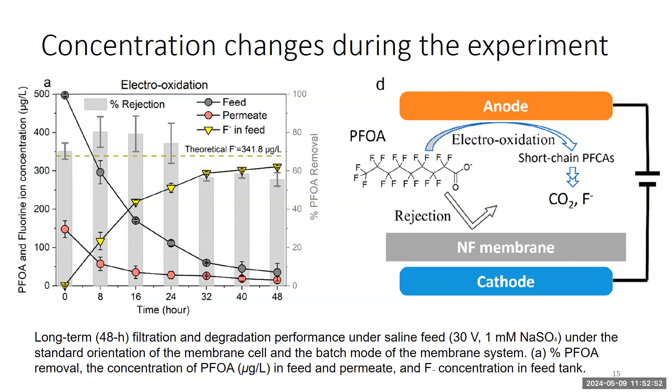We saw before that we want single-pass flows of minutes, but with this membrane we're actually operating around 70 liters per meter squared hour, so it's a relatively high flux. We have very long residence times, which gives us good destruction by trapping these compounds near the anode for a long amount of time.

And we can look at the breakdown into substantially smaller chains of fluoropolymers. We can see we're actually converting most of our compounds into fluorine, getting rid of not only PFOA but the shorter chain compounds as well.

We're applying relatively low pressures—about an order of magnitude less than desalination, but still some energy. It turned out that in our study we were actually using more energy for pumping than for the electric current, so compared to really energy-intensive processes, this looks very promising.

A caveat is that most of these studies were in pure water, with only some subsequent studies having salts present. Pure water has reduced ionic conduction, so you spend less energy on your electrodes. If we look at water flux for this study, we're seeing reasonably high water fluxes and very good PFAS removal.

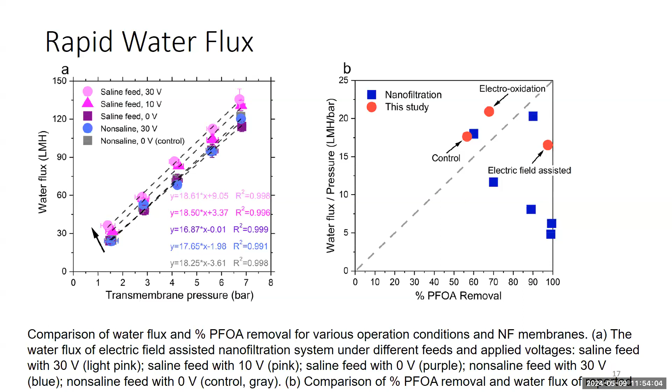I think I went through this faster than I meant to, but that's okay. So specialized nanomaterials can destroy, not just absorb, these forever chemicals. Combining this with PFAS destruction allows concentration of contaminants near the anode, which deals with a lot of the transport issues—we have a trace contaminant in the parts per billion or worse.

Having this long residence time with contaminants trapped close to the anode allows us to get good rejection. When we started adding salts, things became a little unstable, and we need a lot more work in that direction. We still achieved fairly reasonable fluxes, typically in the range of nanofiltration membranes and higher than reverse osmosis membranes, which would be around 15 liters per meter squared hour on the high end.

So I can answer questions. Brian can probably answer the harder questions. And I can also answer lots of other topics on water and desalination, which is more of my background.

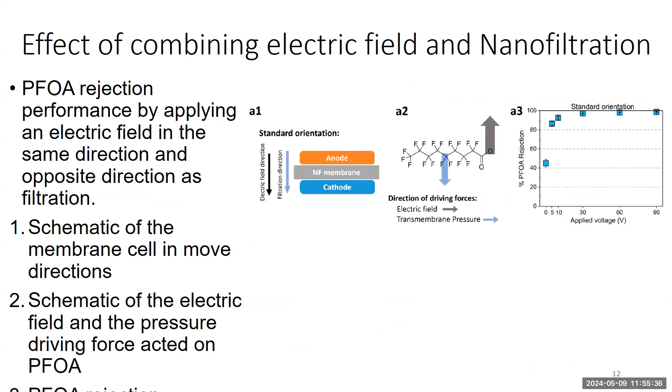Thanks, David, for the talk. I had a couple of questions on the setup. So when you have one anode-cathode pair, the electric field is being produced from the same anode that's doing the destruction? Yeah. Okay, because I was a little confused about that.

So you were saying you're doing this in pure water, just DI water, and adding just the PFAS? Some experiments were DI water and PFAS, and some had sulfate in it. Okay, because the voltages seem extremely high, there must be a lot of resistance within the electrochemical cell. Did you ever measure the actual anode potential? I don't think we did. Okay, that would be interesting to see.

And also, I know from the literature—and I think you showed it in your plot—there are nanofiltration membranes that can get 90 plus, even 98% rejection of PFAS, and yours was quite a bit lower.

Is there a reason for selecting a nanofiltration membrane with low PFAS rejection versus having one that already has it? What's the cost difference?

Yeah, so generally the nanofiltration membranes vary in their pore sizes, and we had one that was a little looser than we probably should for this process. So in future work, I would think we would want to use tighter nanofiltration membranes.

Do you have any information on your current densities for this process? Because if you're looking to save money, power is voltage times current, so placing the electrodes closer together could reduce the voltage and save a lot on energy. Yeah, I'll check.

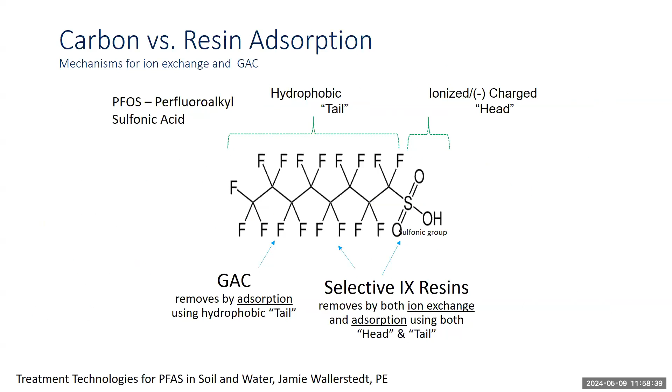Basically this was a small cylinder, about yay big. My other version I sent has, I think, a photo of it.

If we have some time, would you mind actually trying to pull that from the email? Thanks.

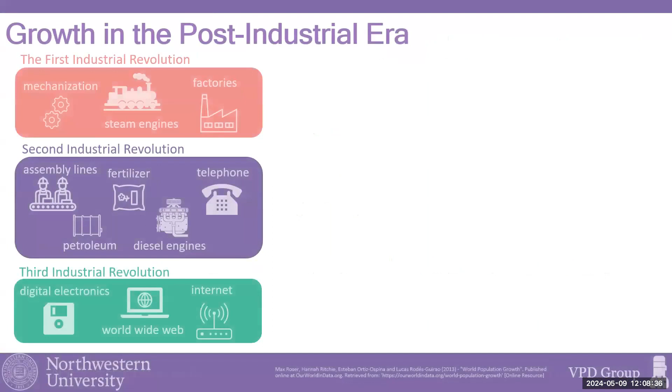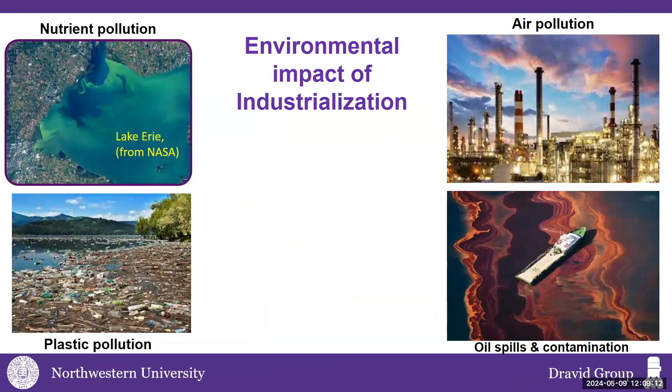But this obviously is the challenge—you've seen some of this before. And I'm not kidding, because of the startup I do go to places like the East Coast, West Coast, and investors, and one on the West Coast actually asked me, is there an app for it? How to remove pollution? You won't believe this level of naivety at times. So there is no app for it.

We had to physically remove it, and this is the challenge I never thought we would be able to meet—going from atomic or molecular scale to the gigaton scale that we had to deal with.

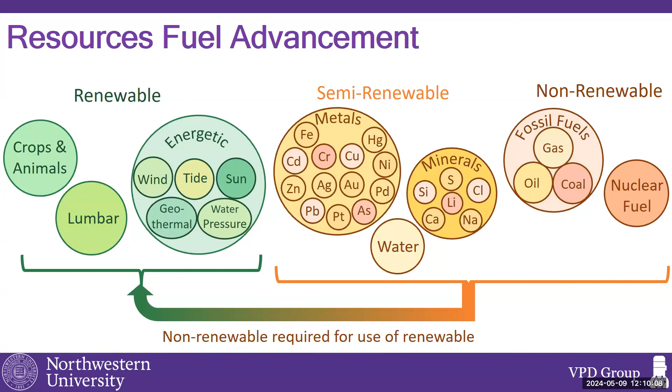The other realization in the last few years—you guys are more expert than I am—is that even to have this so-called renewable transition is fraught with challenges, because we're going to end up using a lot more fossil fuel for renewable too. So even a renewable transition would require considerable fossil fuel use. A lot of the pollution problems you deal with are truly a fossil fuel problem, whether it's oil, methane, natural gas, and so forth. So at least for the foreseeable future, I think this issue of fossil fuel contamination is going to be here for a long, long time.

So there's a sense of recognition now—something I emphasize to my students, which they hadn't seen before—that in societal development, you need some sort of equitable development across energy, environment, and sustainability. It's great to hug trees, there's nothing wrong with that, but you need to provide some value to show why this is important and effective. That's the challenge in the environment particularly: the ability to sustain the effort. So reuse and recover and those kinds of phrases are going to be equally important.

Much of my work has been, as you can see schematically, looking at molecular scale interaction between fluid and surface. We've developed some very innovative microscopy chips where we can look at liquids and gases interacting with surfaces, and we're writing papers on this. But then we realized some of this can be anchored onto a sponge, which is an amazing platform, as I'll try to show you. And if you can impart that selectivity, you can really sequester and capture all sorts of contaminants, not just water-based—we're doing CO2 capture, among other things.

But what we actually need for it to be effective are some really basic things, which again are engineering considerations and not as much science: effectiveness, efficiency, time-wise, in terms of selectivity. Of course, we don't want to create more problems than we solve. So having solutions which are eco-friendly and drop-in—that's something I hadn't appreciated in the last few years—because this is such an entrenched industry, wastewater, stormwater, whatever you want to call it, it goes back hundreds of years, if not thousands.

You need a system which you can just drop in as much as possible, so you don't need to change things. All of those things you probably know better than I do, but that was a revelation for me. Last but not least, it has to be economically viable.

My two kids grew up with this guy, SpongeBob, and it's always very endearing. Other than being cuddly and lovable, sponge has all these attributes. And all we do is very simple.

We take sponge, whether it's polyurethane, which is one type of sponge, generally hydrophobic, or cellulose, which is a lot more hydrophilic. In a situation where there's a lot of water and a tiny amount of contaminant, we use cellulose, and otherwise polyurethane.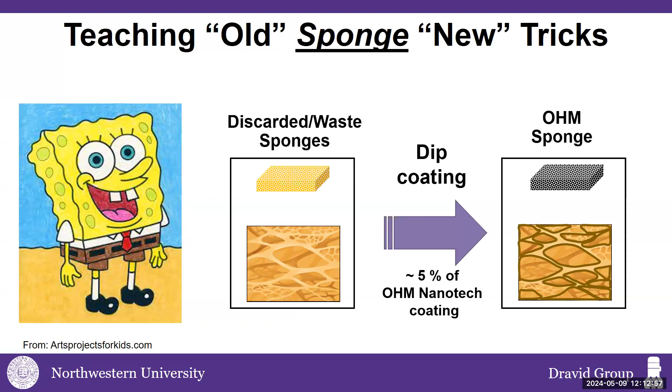All we're doing is creating an affinity at the pore surfaces with a very simple dip coating. It's a technology that goes back hundreds of years. The British invaded India, partly for learning how to dye different clothes and impart beautiful colors. It's the same technology going back centuries that we use.

In terms of the range of pollutants, you have nutrients, which I'll show you great data on, and critical metals, because each metal—I'm a material scientist—we know everything has certain energy levels. I think I saw some great insights into electrochemical sequestration.

There are ways and methods, some in the IP stage for us, where we can tailor our approaches. I'll show you a couple of examples specific to copper or zinc, where we can be very selective in attracting particular elements. Then there are generic classes of hydrocarbons, oil and contaminants like fat, oil, grease, micro and nanoplastics, and CO2 capture, and so forth.

You want approaches which are simple: either water or air flows through them, or you dip them in water, or keep them in air. No pumps and complicated systems, because anything you add adds more cost to it.

So we call it the story of R. We repurpose—typically when you get your holiday gift, you take your iPhone and throw the rest, the foams and sponges, in a landfill. So the first R is repurpose.

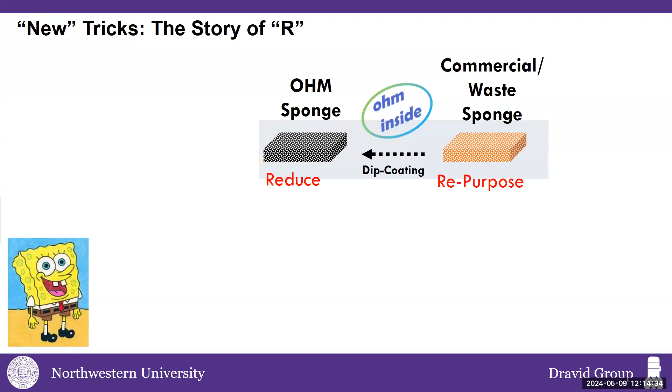Then we have a coating, which I'll show you more about scientifically. The coating implies that you don't need to use a monolithic material. You're using already a small amount—it's like the paint on the wall being the key rather than the wall itself.

So you have reduced material, then you expose it to soil or air. I'll focus on water, this being the water symposium. But actually we have a product where you can absorb oil and other hydrocarbons in soil for weeks and months, selectively. Air works the same way.

I'll get to water. The idea is that the pollutant in the water specific to that particular coating will be sequestered, and we recover it and reuse the sorbent or sponge repeatedly. I think that's the key—being able to repeat this so that when you remove the pollutant, you can monetize it, taking oil and selling it, or phosphate to make a precursor out of it.

And then eventually you restore the environment. That's the big picture. Amazingly, we were able to develop several of these, and I never thought this sponge platform would turn out to be that versatile.

I'll show you quickly the oil spill case of oil removal—two extreme cases, when there's a spill with a lot of oil, versus oil contamination which is sometimes just parts per million. Then, of course, nutrient removal, primarily phosphate, and I'll show you heavy metals and so on and so forth.

There are two parts to our group. One is the characterization part you see on top, and we have an analytical facility I'll show you—you're welcome to visit. We're developing some unusual methods for detection, some of which, hopefully, I'll tell you about next time we meet.

The second part is capture and recovery, which is selectivity through the sponge-based system. The first example is this OHM type of coating—oleophilic, loves oil; hydrophobic, hates water; and multifunctional. You see on the bottom right, very obvious, it repels water with some beautiful pearl droplets.

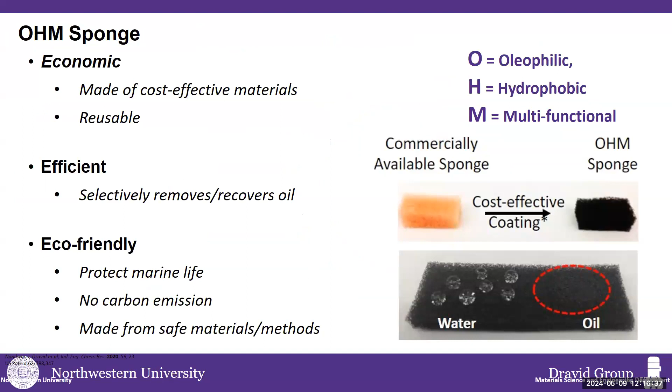So it's very selective for oil. The same thing was done. You put a drop of oil and you can't even see it because it absorbs very quickly. And just above that is a polyurethane sponge, and you do the 5% coating, and that's where the OHM coating comes.

Then the company also took this to the next level, because there are many cases where it's not just the oil spill you worry about. I was very surprised that in 2021 alone, there were 20,000 oil spills documented by the US Coast Guard. It's incredible.

But the other end of the spectrum is 1%, or parts per million, contaminated water. For that, we use cellulose, same basic idea: this OHM absorbs the oil part and lets the water pass through. Compared to all the other competing products, this seems to do very well. So you have these three attributes I mentioned that have been commercialized by the company, and it has EPA approval and California approval for use because it doesn't contaminate, so we're very excited about that.

So how do we deal with this? We start with cellulose, and there's enough known material that has very high affinity for phosphate. All we do is anchor it onto the surface of the cellulose sponge, at one particular pH condition, lower pH, you absorb, and it turns out you can absorb almost 100%. It's just incredible efficiency.

And all you do is tune the pH, increase it, and then it releases, almost 100%. I'll show you a lot of the data. It's just a simple approach for which there's enough literature already. All we did is anchor it onto the sponge and optimize it a little more. This came out in Proceedings of the National Academy just a couple of years ago, in late '21. It was incredible to see the basic science, and I'll show you how that translated into a viable technology in just a matter of 2 years.

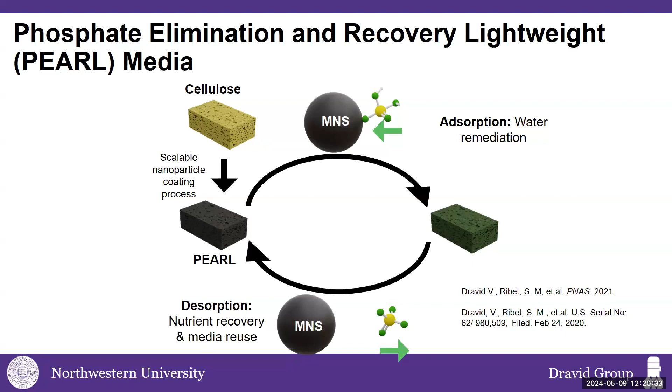So we do all sorts of characterization, testing, modeling, and eventually hope to scale up. This is my plug for the center that was referred to. We develop a lot of analytical methods and techniques, with shop exchange and collaborative programs in all areas of characterization, microscopy, and surface science. I certainly welcome you to visit, and we'll be happy to show you around.

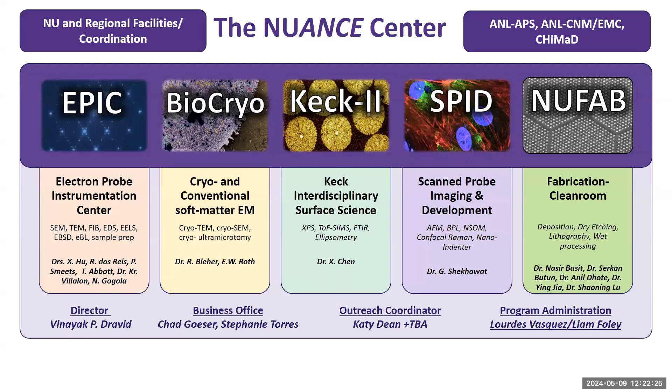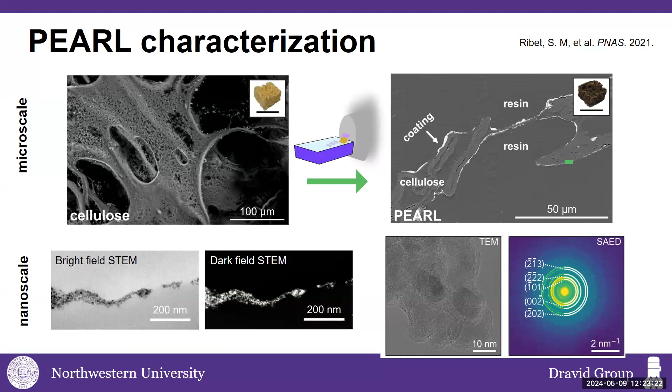This is an example of a cellulose sponge. Just to emphasize, you see hierarchical porosity—large pores, small pores—all of them have this coating. This ultramicrotome section is a very exquisite technique, happy to tell you more. You can clearly see a thin, bright line—that's the real coating, and you can see it's less than 5% of the field of view. So a very tiny amount is still sufficient to impart that functionality you see.

We do exquisite spectroscopy to really understand fundamentally at the molecular level, using electron energy loss spectroscopy to look at bonding and surface information. The details aren't as important because they're in the paper already. You can monitor iron, phosphorus, and their association—we can clearly see wherever there's iron, there's phosphorus, so we know there's an affinity between the two. I'll show you a complex situation, and that's the reason why we do all these analytical studies.

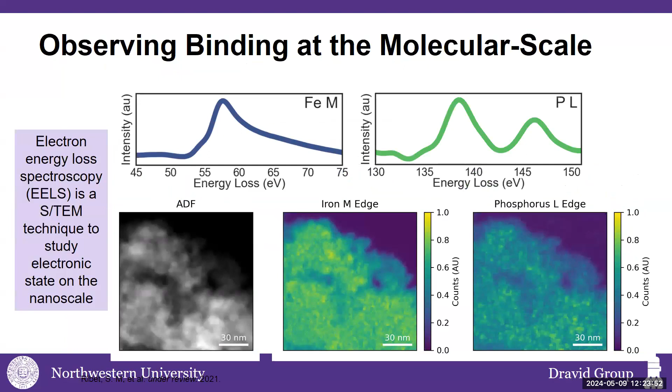Then you have to have real samples. So we work with MWRD, Skokie, Metropolitan Water Reclamation, and many others. We've also worked with a Florida company, and there's another, Storm Trap, a local operation here. They have access to real samples.

So we're very excited that this is an actual real sample. So can we do something more? Because in the Midwest, particularly, there's a history of smelting and metal processing, so copper and zinc are ubiquitous, in addition to phosphorus, of course. I'm skipping a lot of detail, but I'll show you examples.

We're working with Storm Trap, a local company managing stormwater and others, where there's this level of problem: you have phosphorus, copper, and zinc. As you can see, this is from my student just a few weeks ago, and almost 100% we can recover both the metals as well as phosphorus.

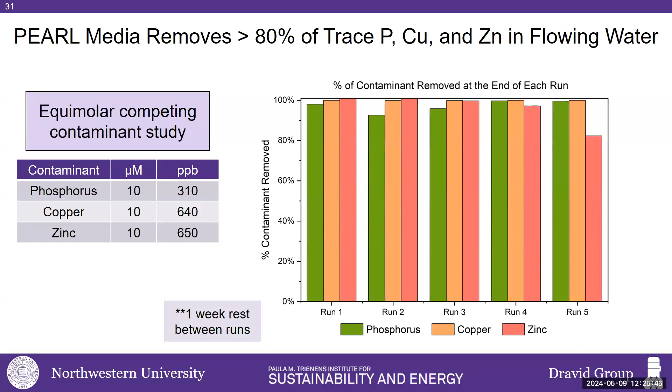90%. And I used to be very worried — I said, oh, it's only 90%. There's one phrase I learned in the last few years, which I'm still trying to digest: perfection is the enemy of good enough. And this is something material scientists are not good at — we want 2 plus 2 to equal 4, not 4.1 or 3.9. But here I have to accept that it's not too bad, as long as you can do it in a realistic condition. That's the psychological adjustment we're making these days.

So that gives you an idea — I won't show some of the other results, but the point is we have all these new contaminants in water that require a very scalable, deployable solution, for which we need that level of effectiveness and the time and scale we can address.

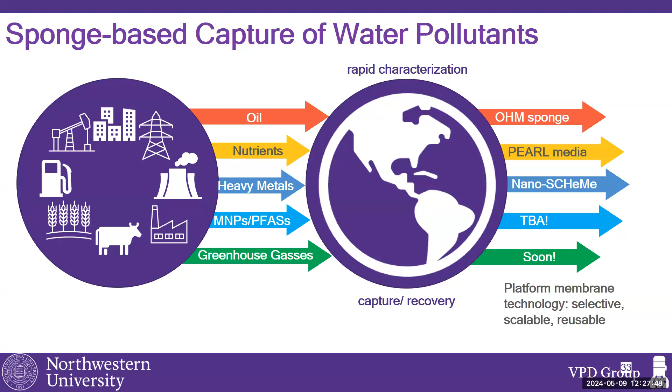The sponge, in addition, is also a great reservoir for organisms. So one of the things we hope to explore is having biological features and functionality imparted within it, because you can have nutrients in the sponge pore as basically food for bacteria, and you can have colorimetric assays and others. So we're working with a synthetic biology group, among others, as we move forward.

Again, none of this is possible without fantastic students, and I look forward to working with your fantastic students so that we can make progress from scientific issues to engineering. So with that, I think I should stop and I'm happy to take questions.

Very good, thank you Vinayak. That was excellent. Questions, Heather?

Yeah, hi — so your sorbent captures phosphate, right? I know that in a lot of places there's a serious issue with arsenic in drinking water and groundwater. Have you applied that there as well, since they're such similar molecules? The answer is, yes, of course, and we have a paper that just came out.

I'll be happy to share with you. I don't know if I have that slide because — let's see. So we've done some screening of — okay, hold on, skip that, it's a little slow.

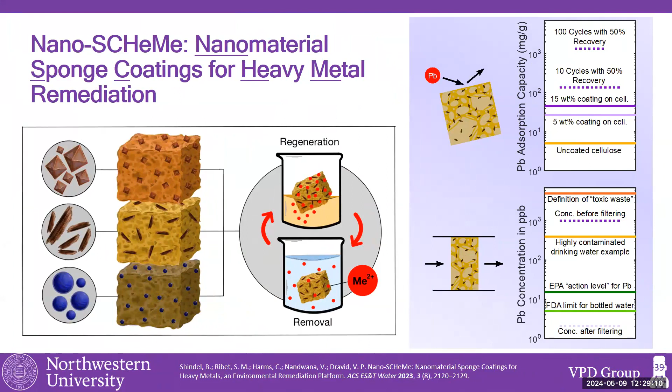Okay, yeah. So there's a version of the sponge with a coating specifically for different metals, and there should be arsenic here somewhere. So yes, for a slightly different type of coating, we can have much more affinity for arsenic. The idea is there are classes of contaminants — lead has certain characteristics, transition metals have certain characteristics. That's why I asked about biology info, because biology is far more specific — an antibody has a very specific antigen, which isn't the case in physical systems. So we have classes of affinity coatings; one class takes care of some of the arsenic issue. The idea is that if a particular water source has a different type of contaminant, you cut pieces of different types and mix them, and address them instead of trying to make a new membrane every time.

Thank you for the talk. I'm curious about the pH-dependent desorption. Is that related to the speciation of phosphate by pH, or is it a change of the surface by pH?

That's a very good question, and honestly I don't know for sure right now. Those are some of the questions we'll try to address. First, we weren't even sure this would work at all. Now that it's working to the level of sophistication we expect, we're taking a step back and asking what speciation there is, and what other forms of phosphorus exist. We're doing a lot of characterization, and some answers will come out of that. Otherwise, we'll have to adjust the coating or other parameters. But at least the fact that the Skokie water supply, going into tertiary treatment, seems to be working gives us confidence that we're addressing some of the core issues.